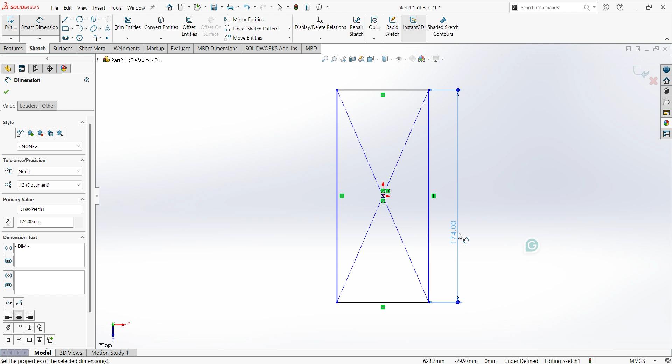Change the unit here, mmgs. Select extrude, select the top plane, create one center rectangle. Give the dimensions: 174 and 46 mm. So finish sketch, extrude up to 16 mm.

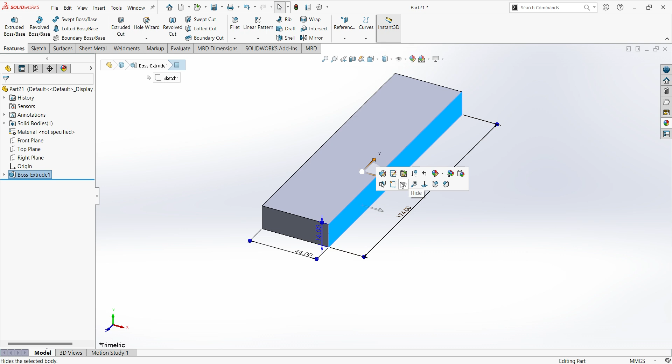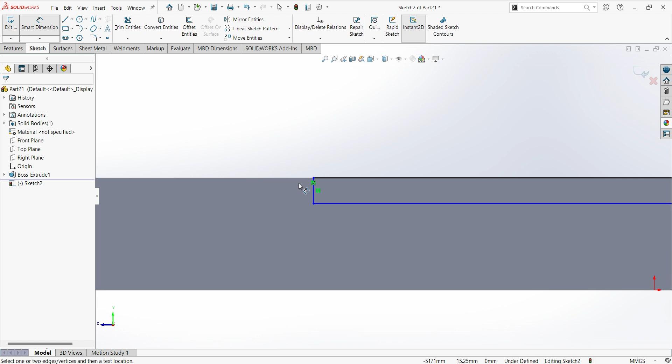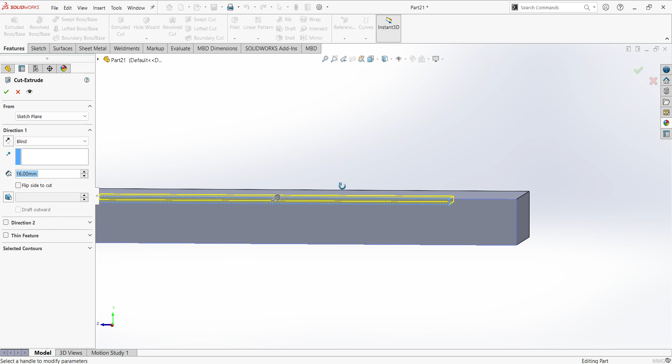Next select this surface, sketch, create one corner rectangle here, give the dimensions: 24, this side is also 24 mm, depth is 2 mm. So finish sketch, extruded cut, can select through all here.

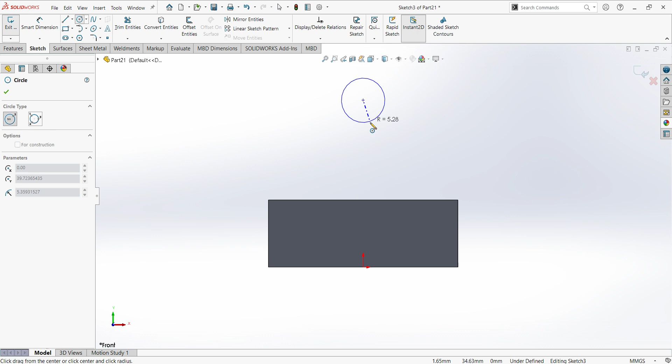Next there is one flange. For that select the front plane, sketch, select circle, create one circle, give the dimension 46 mm, height is 50 mm from the base.

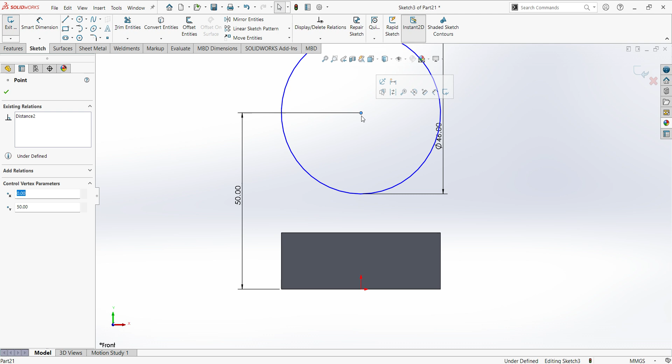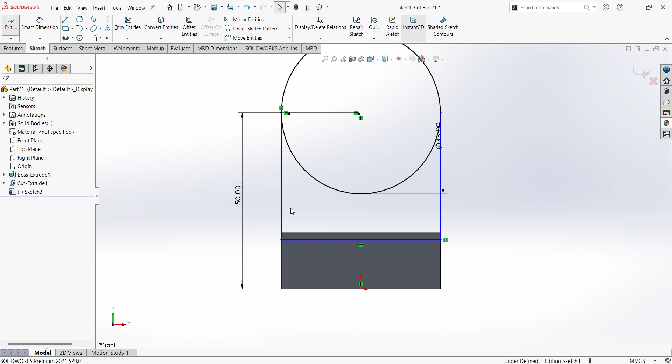Give the vertical constraint here. Select line. Give the tangent constraint. Select this point. We can give the select the convert entities.

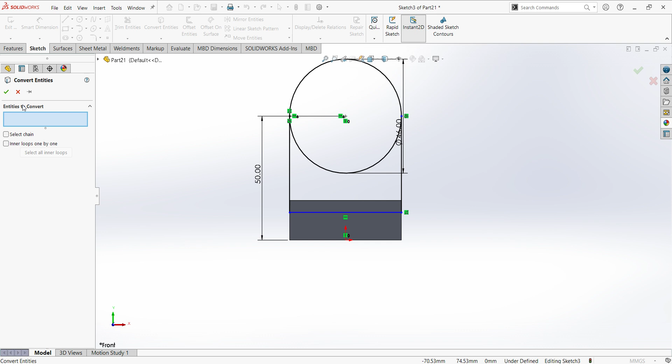Give the dimension otherwise, sorry this is 36. Trim entities, trim this last circle.

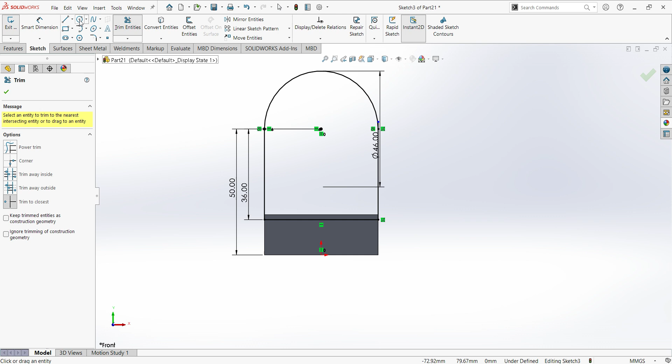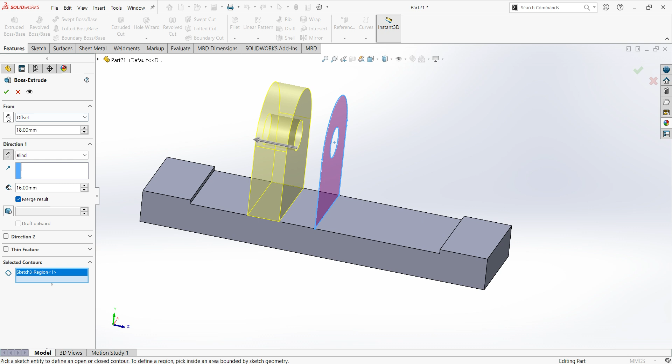Next there is one more dia 15 hole. So finish sketch. Select extrude, reverse the direction. Here we need offset 36 by 2, 18 mm, this thickness is 16 mm.

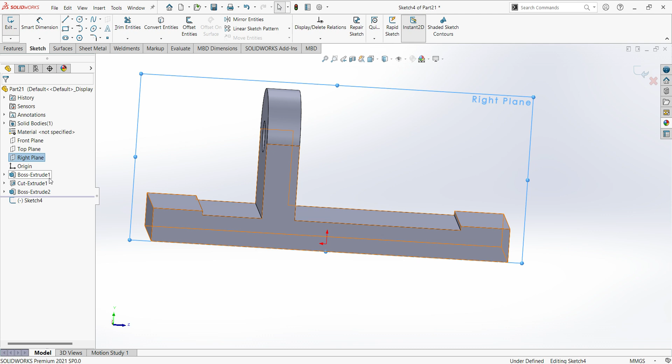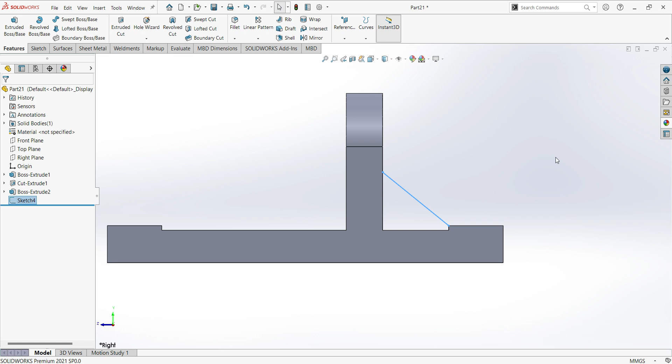Next select right plane, sketch, create one line here, give the dimension 25, so finish sketch, select here rib, thickness is 12 mm.

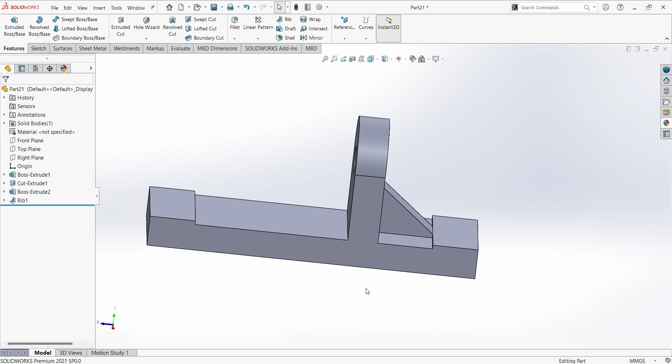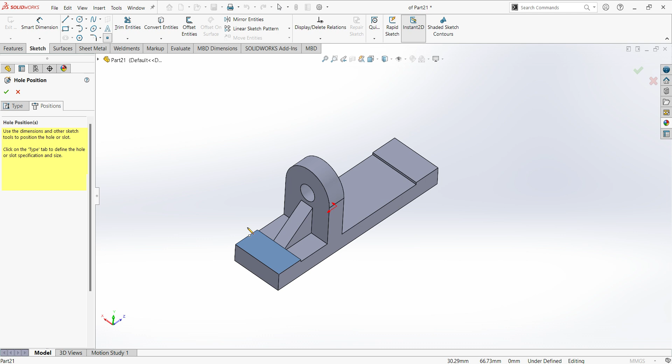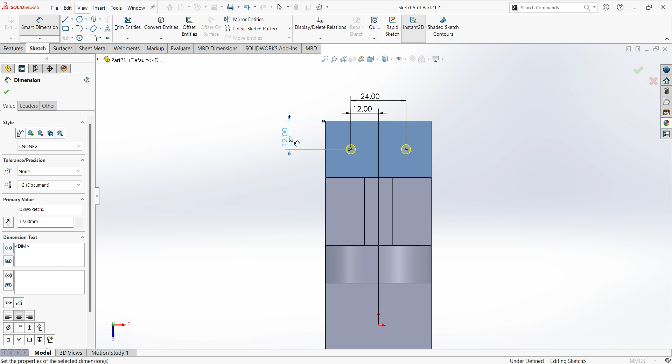Next here there is dia 4 holes, select this surface, we can give direct holes, simple hole, drill size and diameter 4 mm, through hole, select the positions, Ctrl 8, give the dimension here, pitch is 24 mm, from the center we can give 12, here to here 12 mm, select this and this, give the horizontal relation, finish sketch.

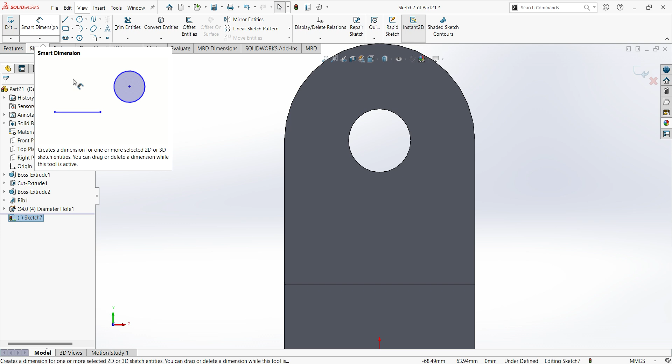Select this surface, sketch, circle, diameter 28 mm, select convert entities, select this circle, okay. So finish sketch, extrude 2 mm.

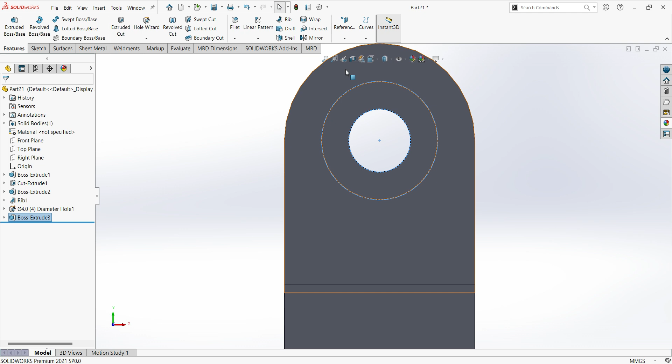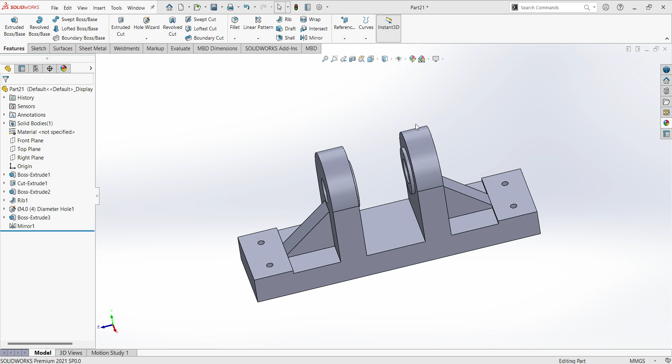Next select all these features, mirror about front plane, okay. Next there is a fillet R2, two mm, select this also.

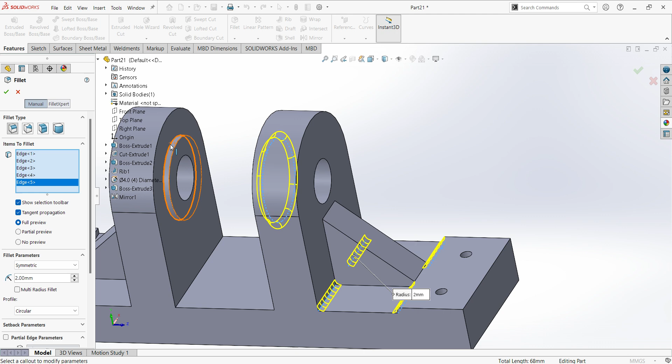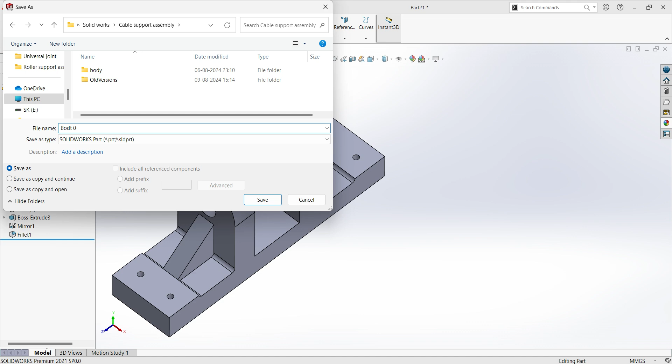Save the part, assign the material here, polished steel, go to edit appearances.

Close this, second part is roller.

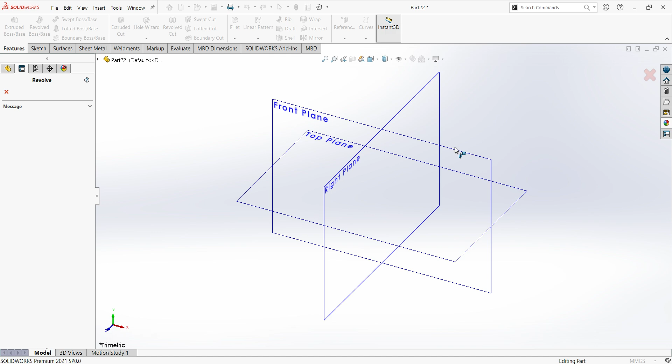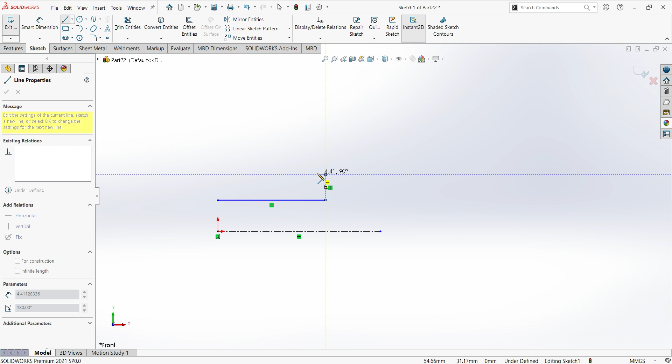Select here revolve, front plane. You can see the roller drawing here. Create one center line. Line. Select this and this mid, give the vertical connection. Give the dimension now. This inner diameter is 14 mm.

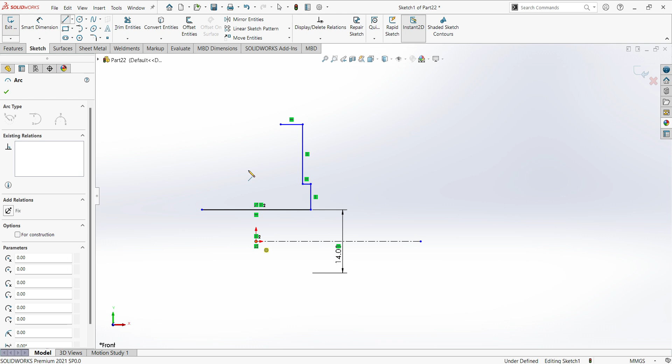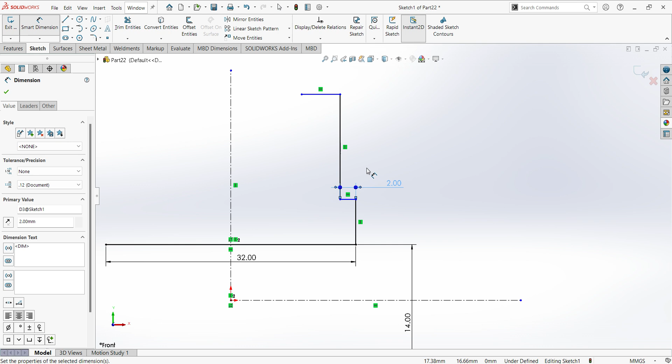Create one more circle here, sorry center line. Okay, give the dimension, this is 32 mm. This diameter is 56. This diameter is 26 mm.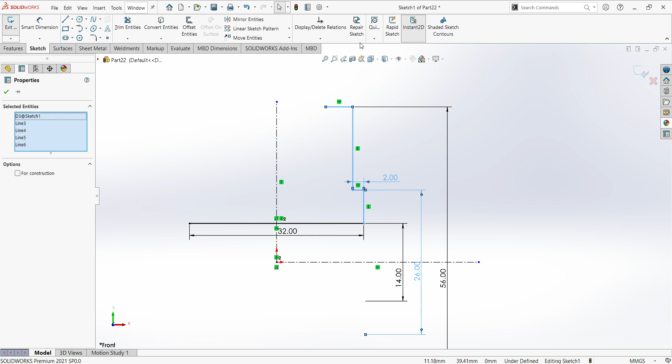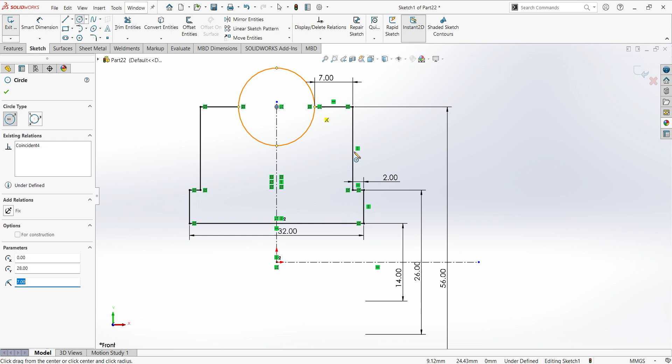Select these lines, do it mirror. This dimension is 7 mm. So create circle here. Trim entities, trim this circle. So give the dimension. Finish sketch. Select the center axis. Okay.

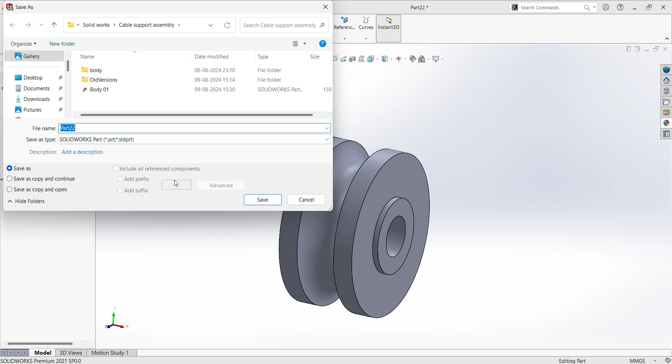Save as a roller. Assign material.

Close this. Control N for new part.

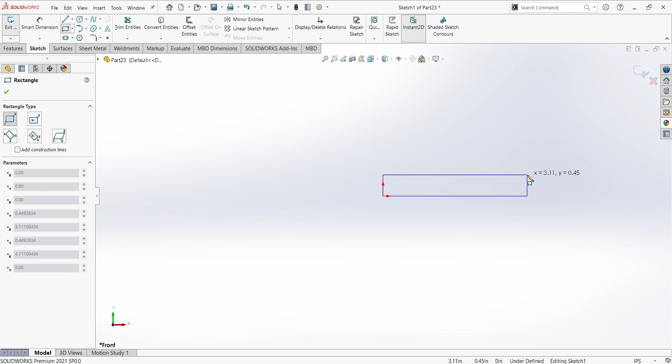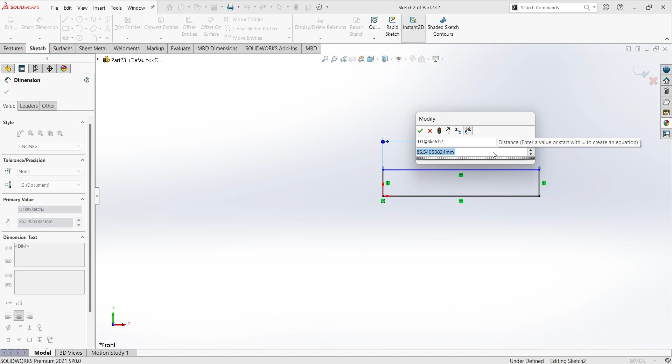Select revolve, or you can do extrude also. Give the dimension. Change the unit first. Front plane. Create one corner rectangle, give the dimension. Length is 70 mm. Diameter is 7. So finish sketch. Select this as a center axis.

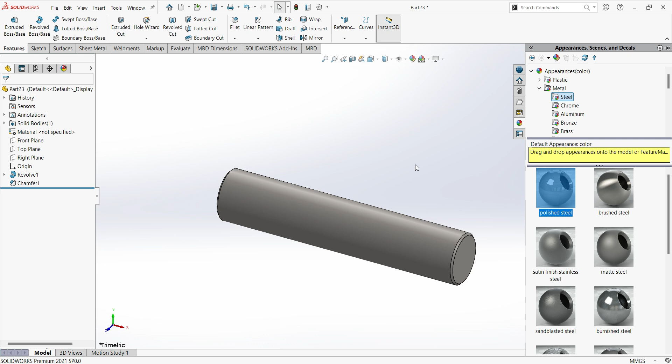Chamfer 0.5 is okay. Steel. Okay, save the part as a pin.

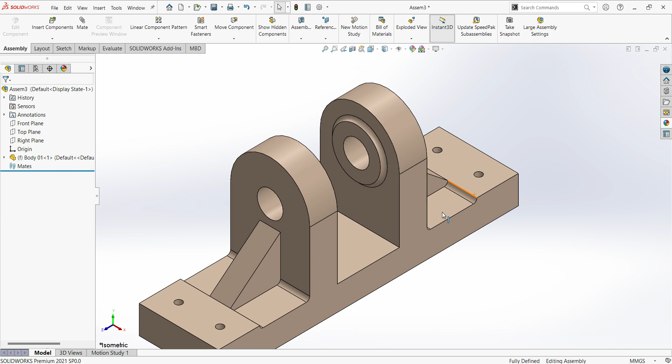Close this file, new, open the assembly template, change the unit first, insert components, take the body first, so assign parts, roller.

Give the mates, okay, this face and this face, that's it. It will rotate like this, you can see.

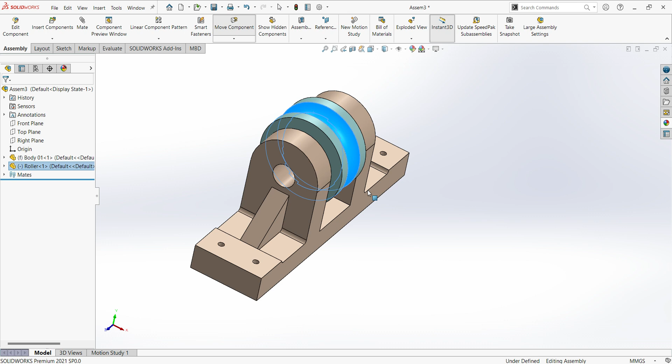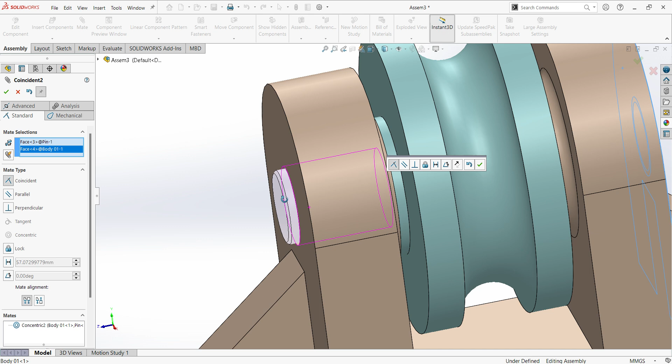So that's it friends, assembly. It is a basic assembly. So I hope you enjoy this session.